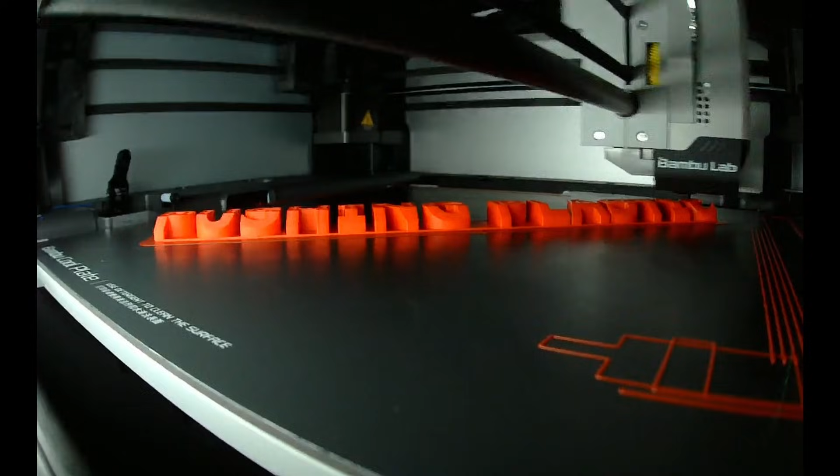Okay, so I have this simple little box, and on the bottom, the words Pushing Plastic are extruded upward. Well, we don't want those in this case. So I'm going to show you how to get rid of those in just the slicer.

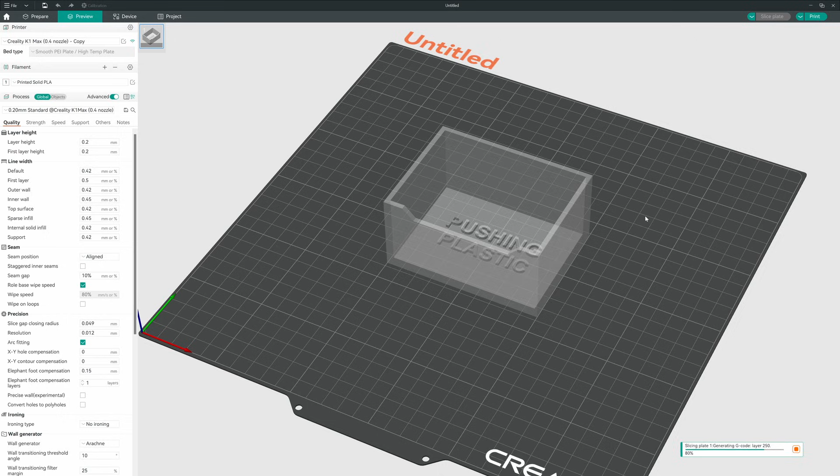What I'm going to do first is go ahead and slice, and I want to see where those words start. So I'm going to come on down and it looks like layer 15. Layer 15, 3 millimeters up from the bottom.

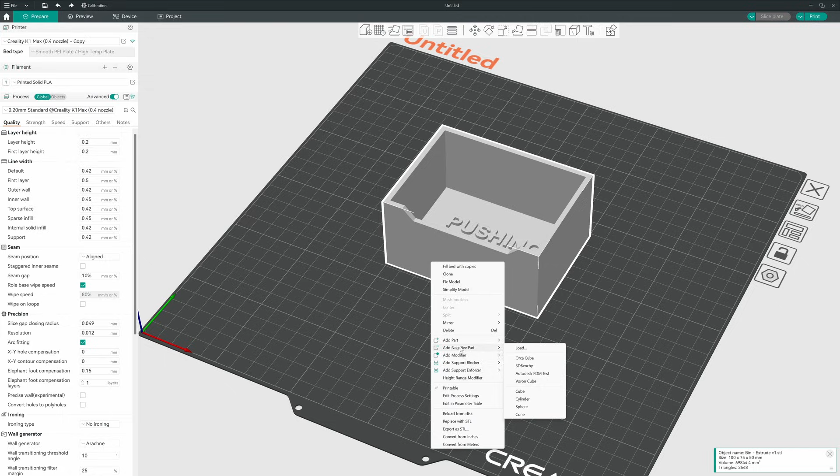Okay, so we have something to work with now. What I'm going to do now is click my box, right click my box, and hit add negative part. I'm going to select cube. And the first thing we'll notice is we get this nice little dialog telling us that we got to switch to per model setting mode to edit the modifier settings, which is anything affecting the cube.

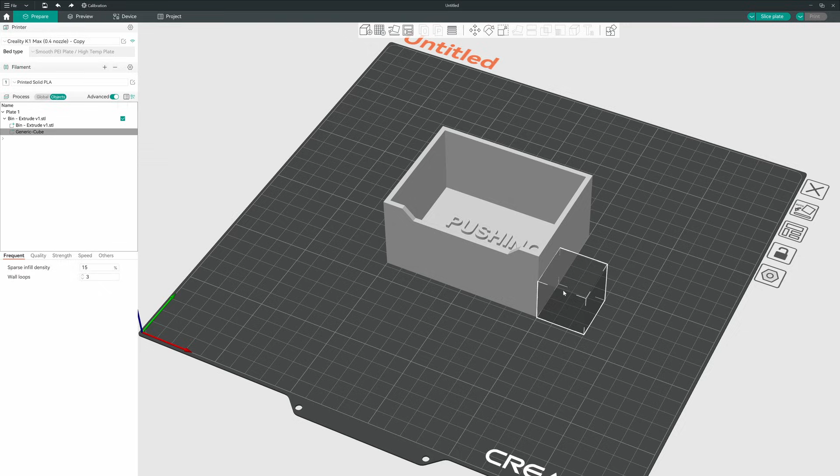If you come over here on the left side of the screen, in global mode, that's everything. Object is just what's selected. So let's go ahead and move this little cube, which is 30 millimeters by 30 millimeters by 30 millimeters.

I'm going to go ahead and move that by dragging the arrows, and I want it to cover up the words Pushing Plastic. Just move it the best I can. And then I'm going to go ahead and scale, make sure uniform scale is off. That's just the way I like to work. I'm going to stretch it out.

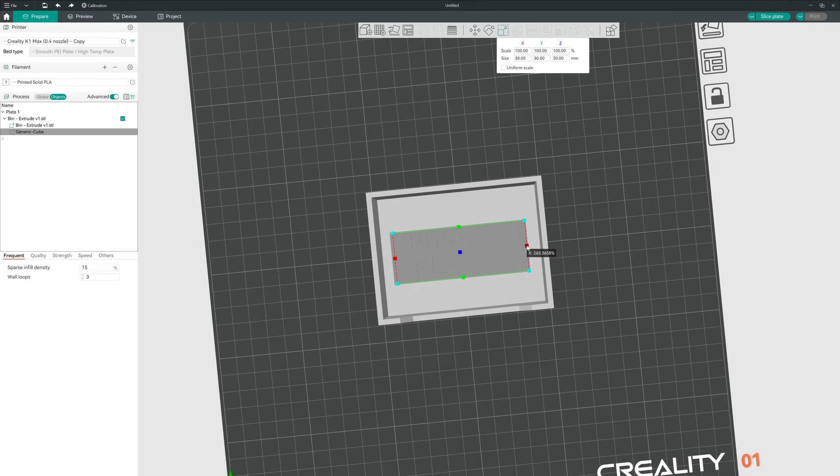And right now, I'm going to go ahead and reslice. What we see now is a nice big old hole in the bottom of our box. We don't want that. We just want to get rid of the words Pushing Plastic.

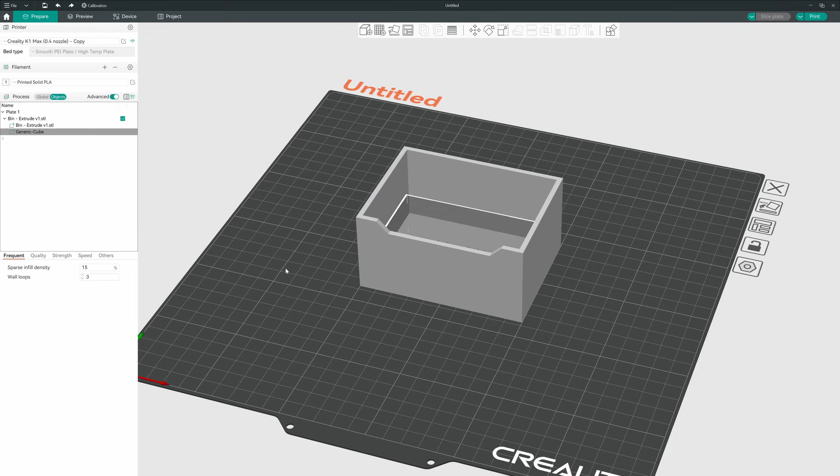Anything that intersects with that cube is what is going to be affected. So we already know that the words are 3 millimeters up from the bottom. So what I need to do is move that cube 3 millimeters above the surface. I'm going to click that cube, which is no longer a cube, and hit my move. You can see where it's negative 10.

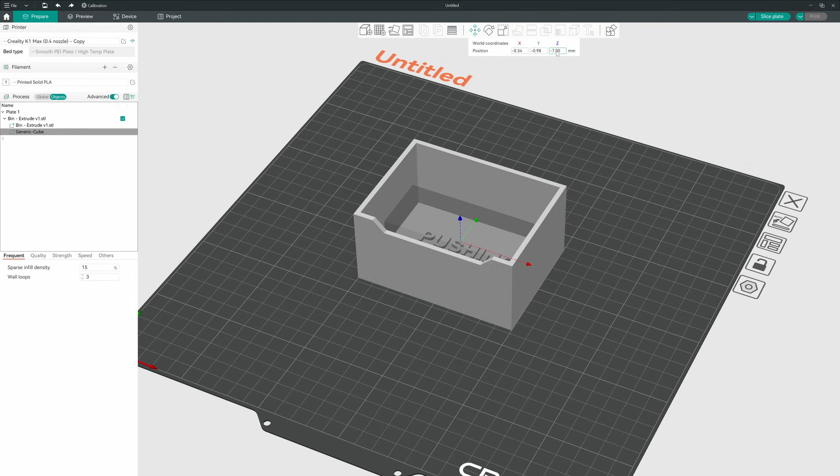Well, that negative 10 is actually to the center of that cube. What I need it to be is negative 7. It was negative 10, so what that did was move it up 3 millimeters. And now when I go ahead and slice it, there we have a nice smooth surface. The words are gone.

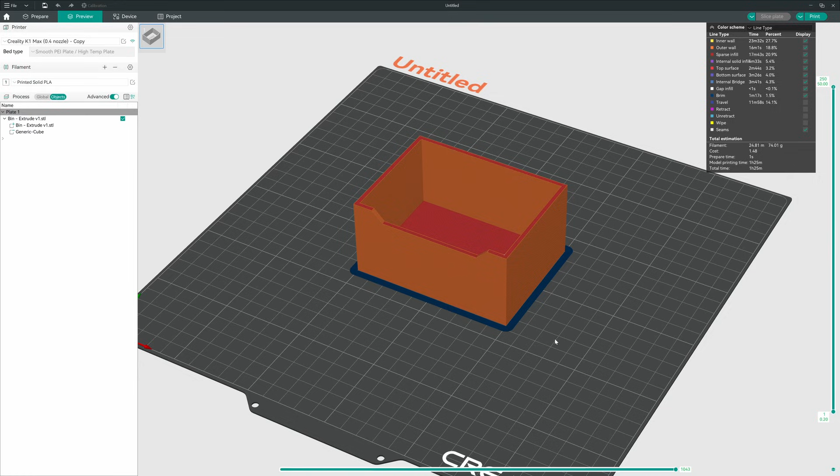And again, it doesn't have to be letters or words. It can be a cylinder that's sticking up there, a pyramid, anything that's sticking up that you want to get rid of. Doesn't even have to be sticking up, it could be sticking out, anywhere, anything. Whatever you want to get rid of, add negative part. That's all there is to it.

So let's keep moving and let's go on to the next one. As you saw, removing areas of a print from an STL is pretty painless. Let's take it a step further.

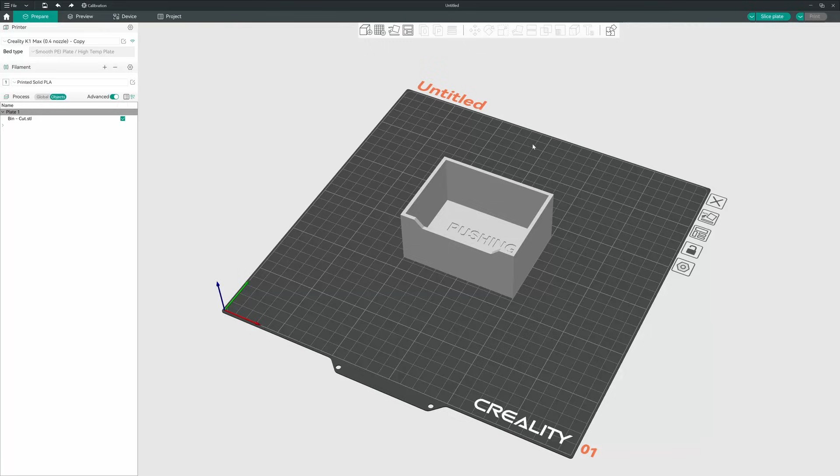Okay, so this time what I have is the same box, but this time the words pushing plastic are extruded down into the bottom. So we're going to fill that up. And it's almost the same process. It's just as easy. Let's click on our box, and we're going to right click. We're going to add a part this time, and I'm going to stick with the cube.

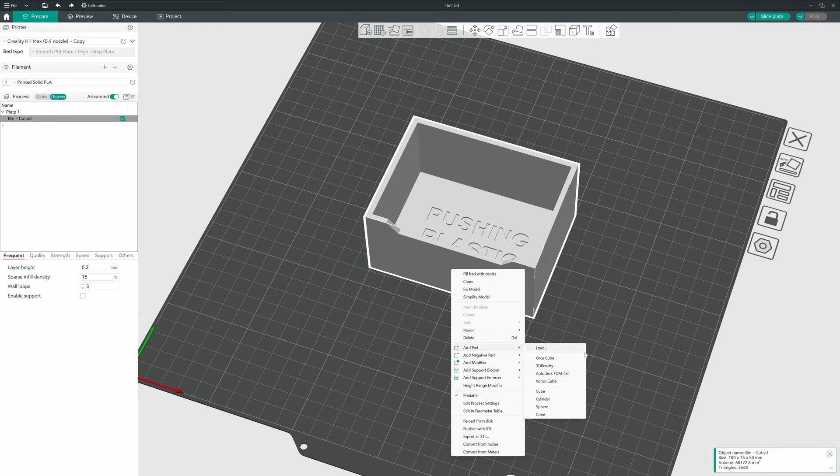We got our 30 millimeter cube. We got our notification about the per model settings. And I'm going to go ahead and start covering up the words pushing plastic. Not like that though. You want to make sure you're on the cube when you're grabbing the arrows; if you miss, you're liable to do like I just did. And now I'm going to go ahead and scale. Stretch him outward, and I'm going to stretch in the X and Y directions. And there we have it.

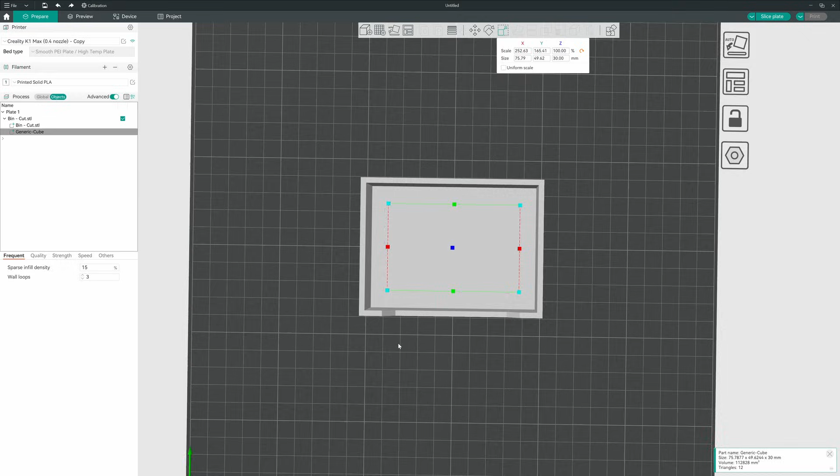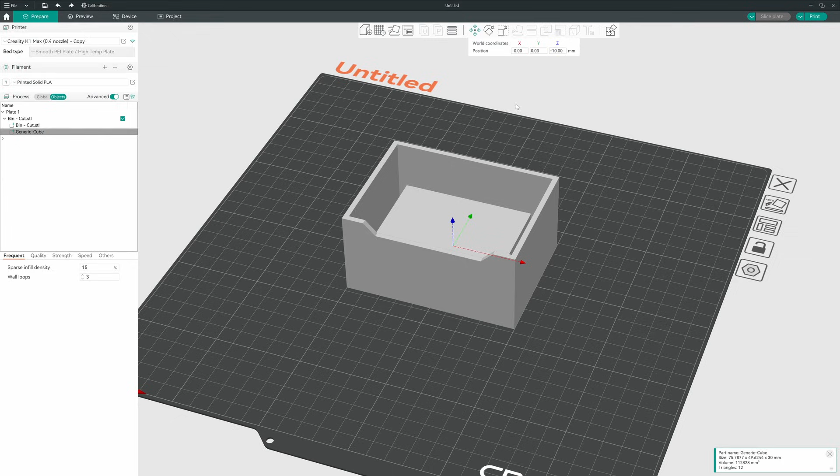Now, if I slice right now, what we did was just add a big giant rectangle inside of our box. Not what we're after. I need to make sure that this top surface is flush with the top surface down here. So let's go back to prepare, and I'm going to click on the cube, and I'm going to move that. We know it's 30 millimeters tall. So what I'm going to do is change this to minus 37 because I want the top flush. And there we have it.

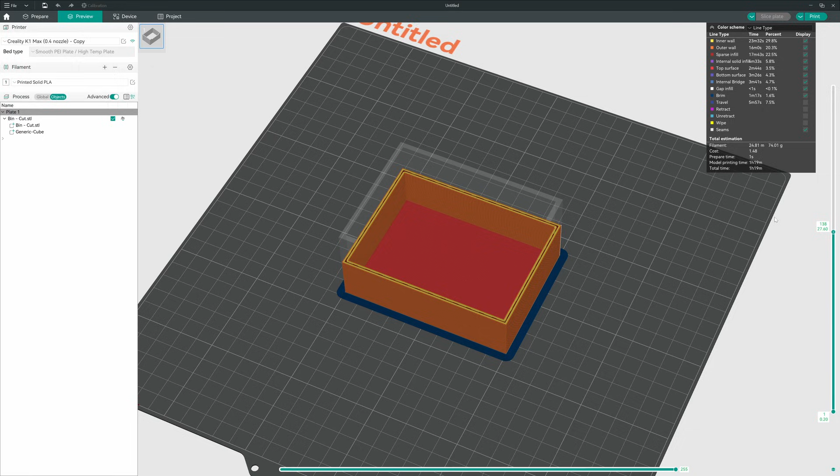And if I slice, no more words, they're all gone. We'll extrude that, we'll go through the layers and make sure we have nothing that we shouldn't. And there we have what we wanted.

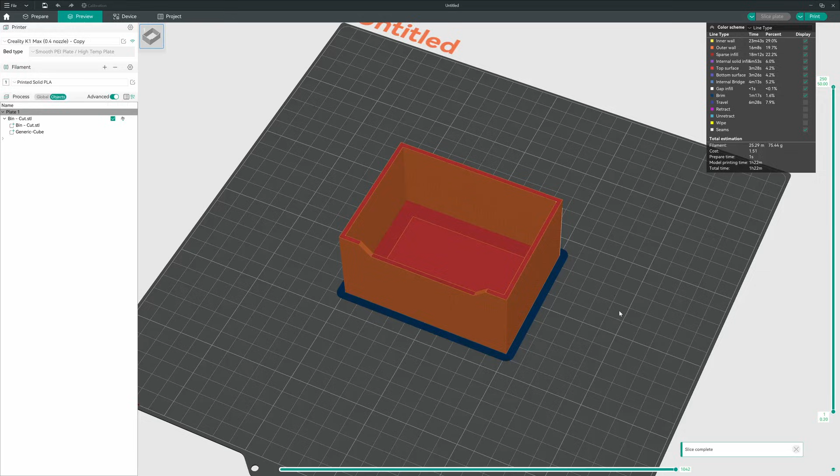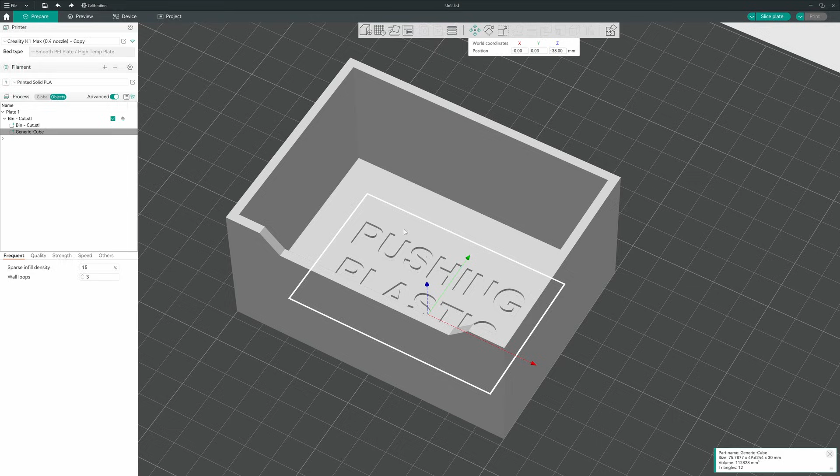Now, if I go back to prepare and I grab onto the cube, and if I would have set that to say 36 and I slice, you'll notice we have this little part that's sticking up out of it. Not what we're after. So I wanted to make sure I was right at 37. If I come back and try to move that, let's see what happens at 38. Notice at negative 38 we're going to see part of our text. So 37 is the golden spot.

And that's all there is to it. You would slice, print, and you got your perfect box. No text on the bottom. That was pretty easy. Let's move on to something with a little bit more substance and manipulate more areas.

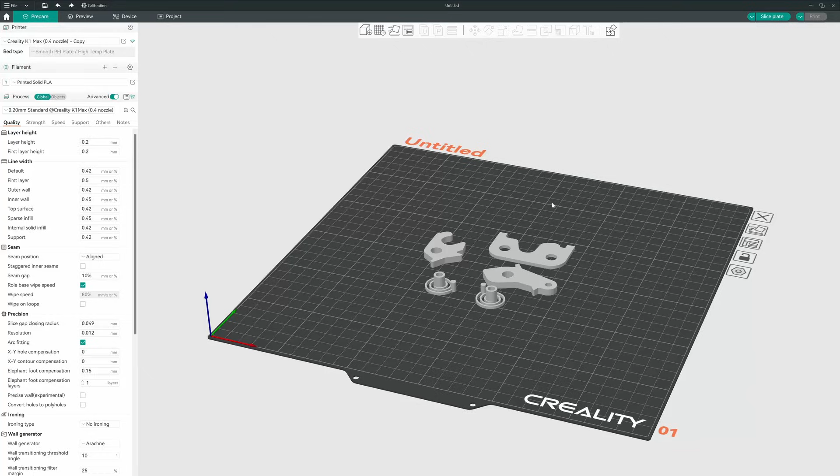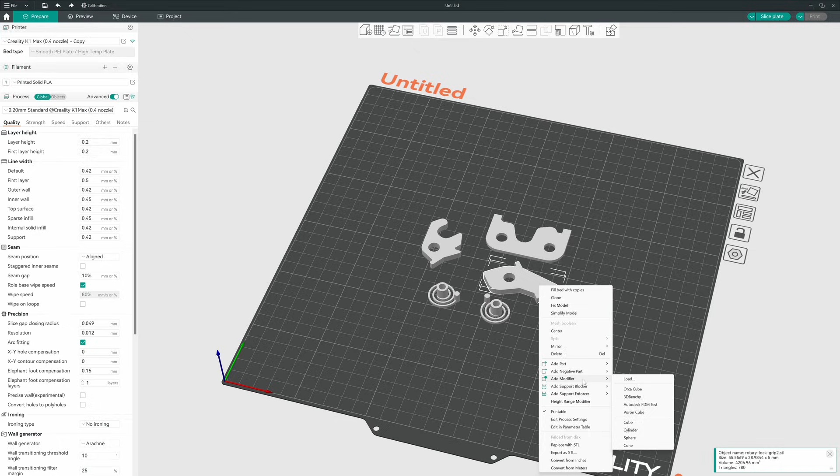All right, so I have a few parts here on my build plate. This here is a rotary latch that I downloaded from Thingiverse. The designer is Mariko Martins. Mariko recommends 25% infill for everything. I'm going to change it up a little bit. So on this part, I want this top area to have, let's go with 60% infill. So I'm going to right click, select add modifier. I'm going to stick with the cube.

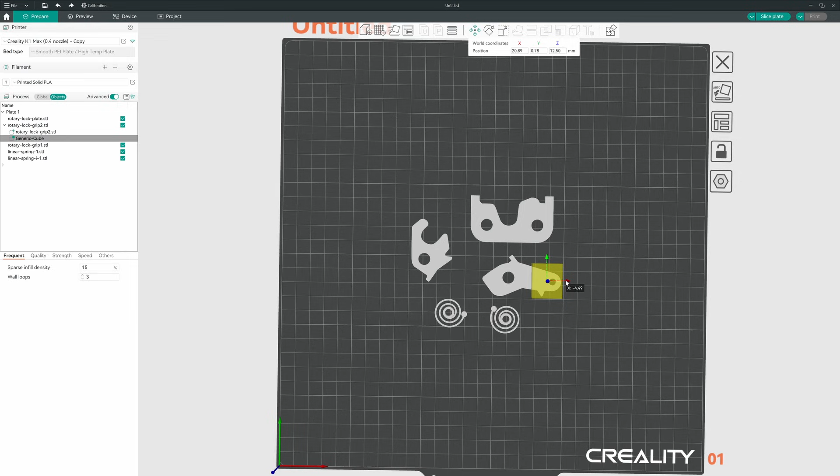We'll get our standard dialog box, and I'm going to move that cube so it covers that area up. Now I can scale this, move it, whatever I want to do, as long as I cover the area I'm working on. Anything that intersects with that yellow area will be affected. So I have that changed.

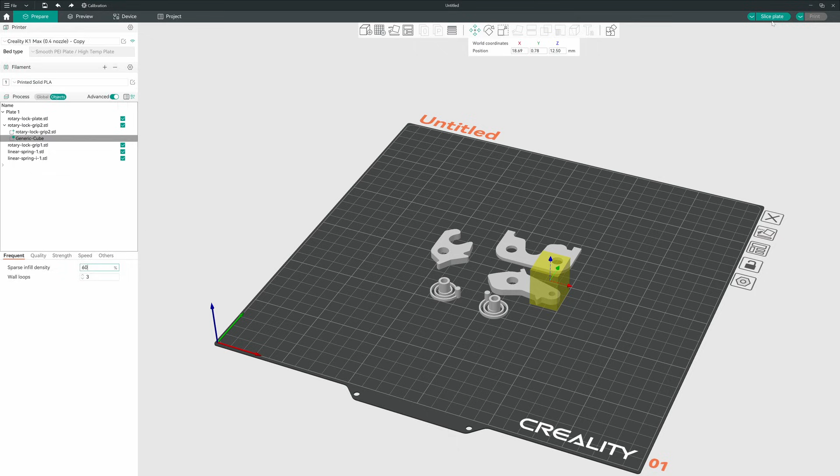I'm going to come over here on the left side of the screen, and it's showing me my frequently used commands in this particular area: the infill and the number of walls. I'm going to change this to 60. And let's go ahead and slice and see what we get. Let's cut down through. And there you can see we have 60% infill over here, 15% there.

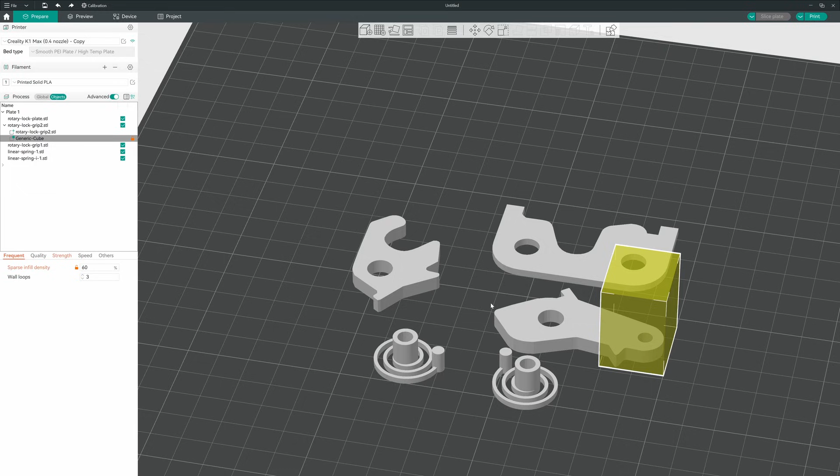Now I'm seeing this little nub area up here, and I'm afraid that might break off during operation too. So let's change that while we're at it. Just click your part, right click on it. We're going to add a modifier. I'm going to go with another cube. We'll get our standard dialog. That can get annoying, but like I said, I prefer to use it myself as a reminder.

Let's move the cube. And I can also go ahead and scale that. I'm mostly doing the scale just to keep it off my other part up above it. I'm going to move this.

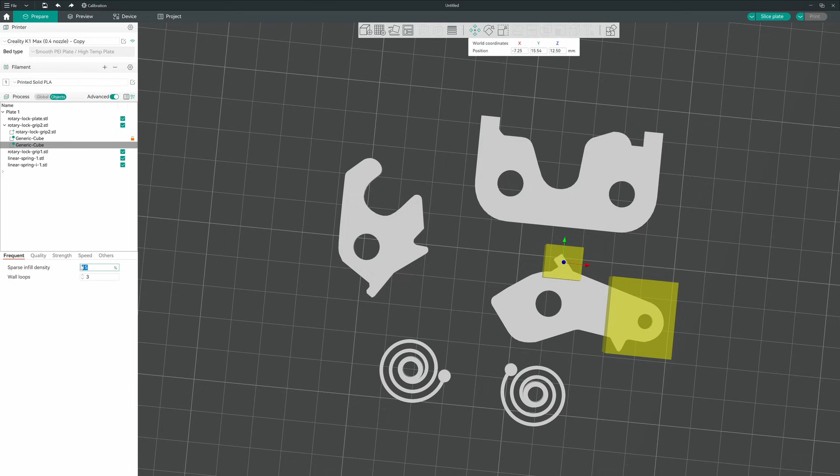And I'm going to go with 60% infill here as well. So let's slice the plate. And you'll see now we have 60% infill. If I wanted to, it's not helping us a whole lot with that little bit of extra infill. I could go back to prepare and I could bump that area up to maybe 70 and we'll reslice.

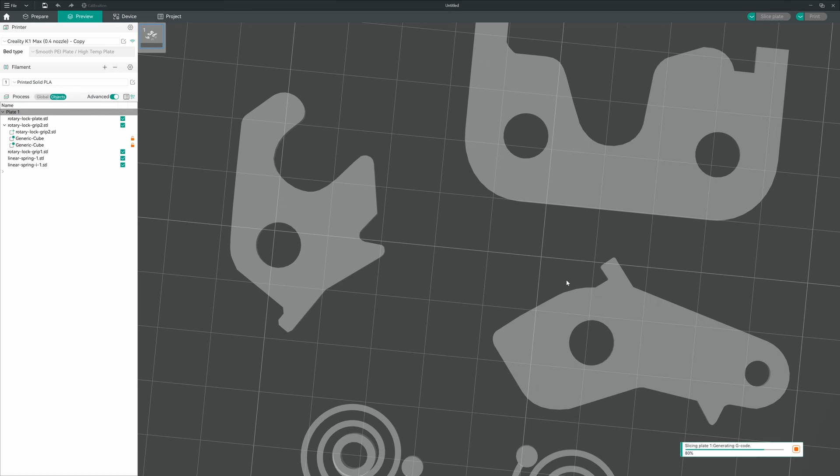It's a little bit better, but maybe we would be better off if we just increase the number of walls in that area. What do you think? So let's come in and let's just increase the walls to 4. I'm going to take the infill back down to 15 and let's see what we end up with. There we go. That looks a lot better. It's going to be a little bit stronger in that area. I'm good with that. But now let's go to another part.

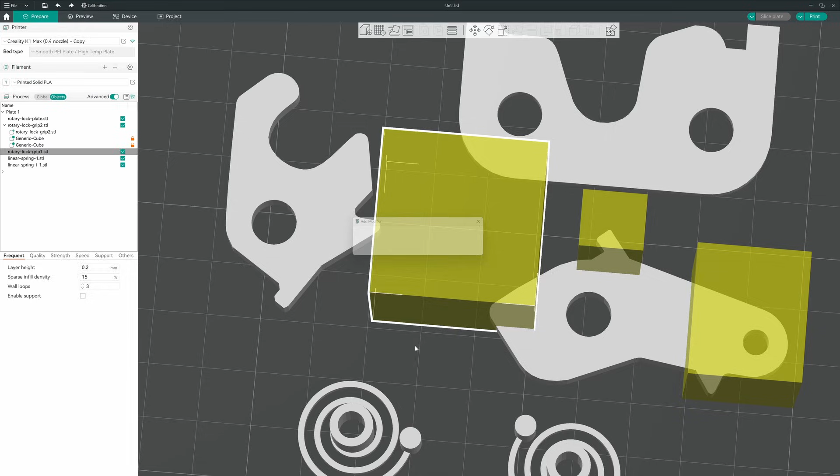And this part over here, that's going to see a lot of stress as far as I'm concerned. So let's go ahead and let's add a modifier to this. Let's stick with the cube. And I'm going to move it. I'm going to scale it. I'm going to cover up the whole part. Let's move it again so we get the whole part in there.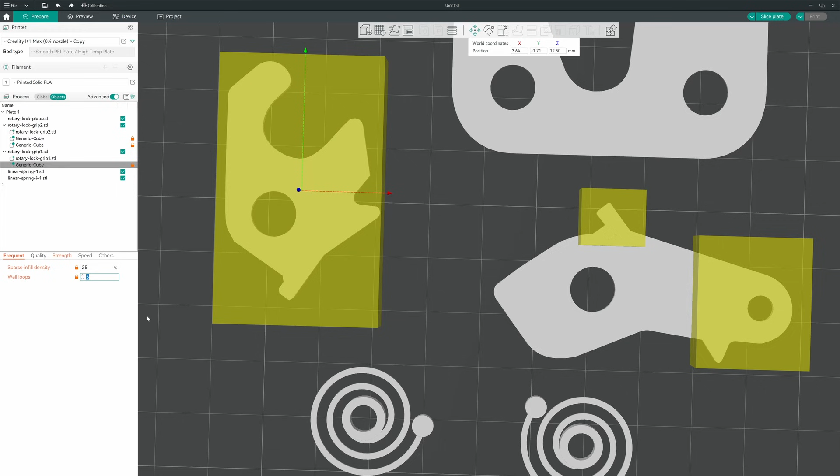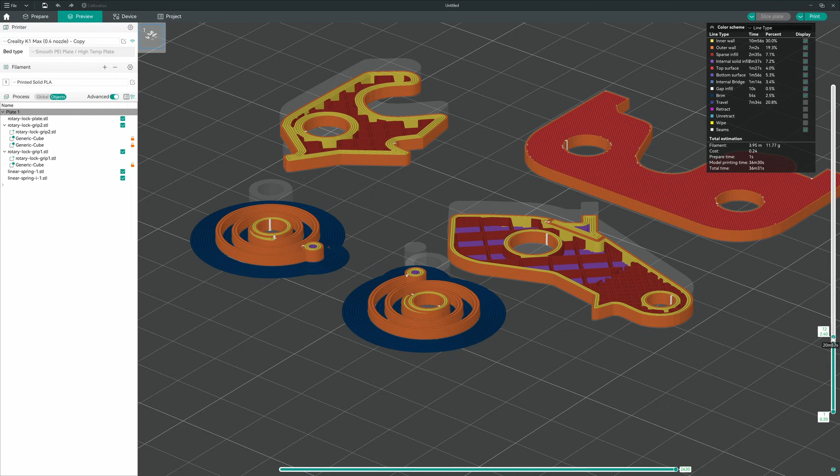I'm going to leave it at 15%. I'm going to change the infill on this one to, say, 25%. But I want 5 walls. Now let's slice and see what we got. Okay, so we got our 5 walls. Good. We got the infill we want at 25%. On our original part, we still have the extra walls. We got the 15% infill here, the 70% over here. And if I come down through a little bit deeper, you'll notice that we're at the original 15% infill here.

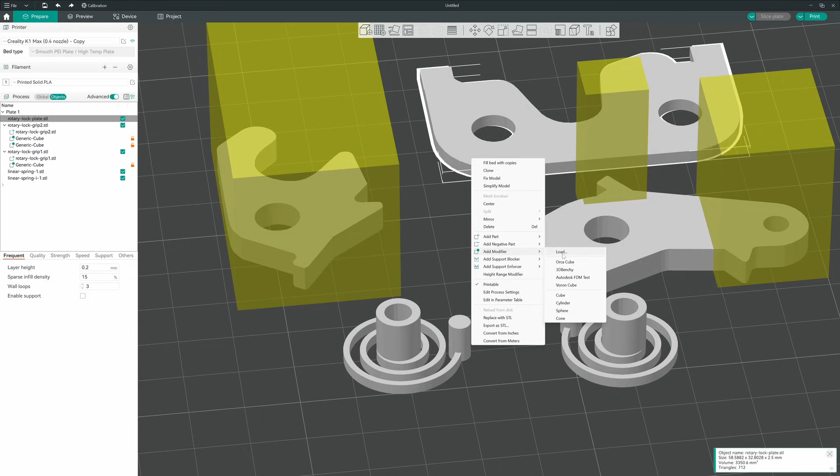Now I can go ahead and let's just add walls to this part right here. Just this one circle. So let's go back to prepare. Let's click on this part. We're going to add a modifier. And I'm going to go with the cylinder this time. We'll get our warning. I keep saying warning. It's not a warning. It's just a notification.

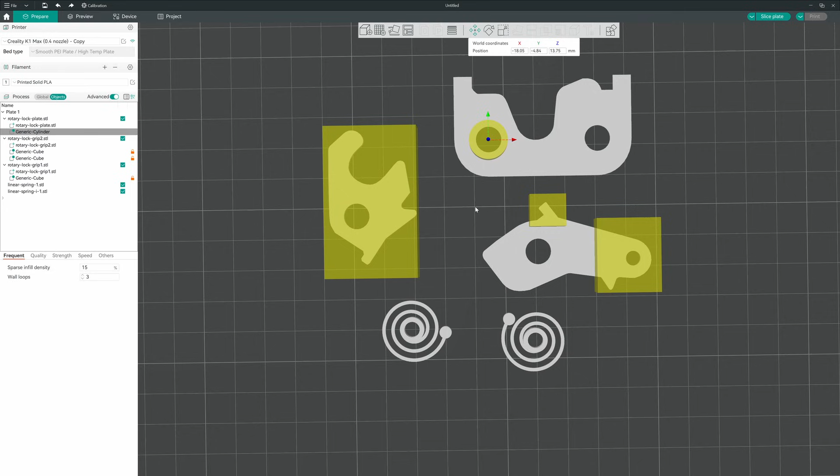I'm going to bring that over. I'm going to try to center it up the best I can just by eyeballing it. I'm going to go ahead and scale it. Recenter it just a little bit. Now, notice this time it's floating above it, and that's because of the way I did my scale. So not a big deal. Just grab it, drag it. It doesn't matter if it's sticking through the bottom because it's not going to print anyways. So let's leave the infill for that area at 15, but change the number of walls to 6. And we'll slice.

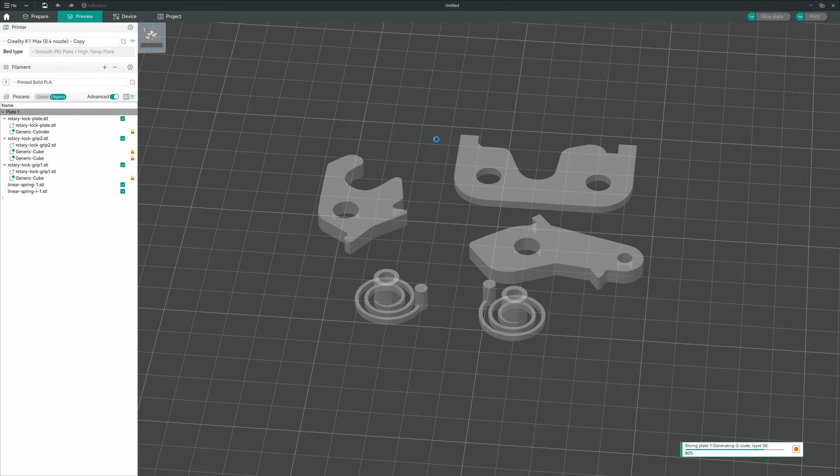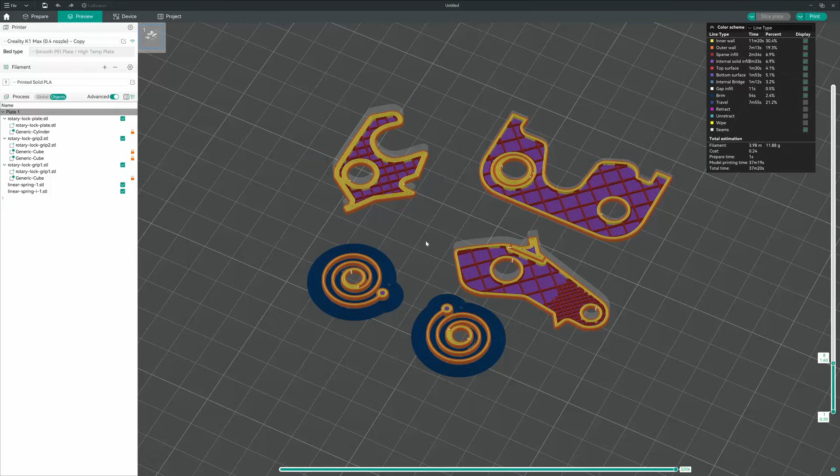And there we are. So what we are getting now is we have 3 parts, different changes. This part here has 3 different sets of settings to it. This one has 2. This has 1. Well, 2 if you look at it differently, depending on if you include the original infill and the original walls. But this just goes to show how we can change different parts on a model without actually redesigning or going through a modeling program. We're just using the modifiers in Orca Slicer.

Now, I've only touched the surface of what you can do with Orca Slicer's modifiers. You're pretty much limited by only your imagination. Experiment with the settings. Slice it up. Go ahead, make changes, check the preview, see what you can do. Like I said, you can save time and material by slicing with your modifiers without compromising the print or the quality.